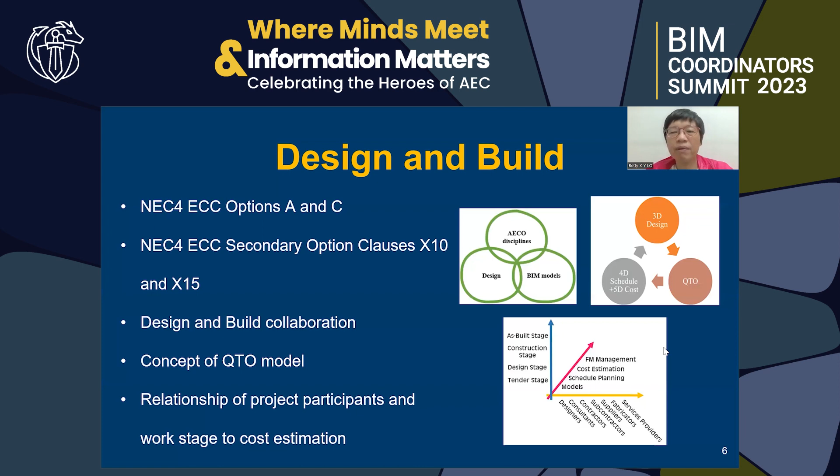Now, the workflow of automatic QTO and cost estimation. Data collection: preparation of pricing documents, project manager instructions, and design drawings; establish QTO modeling and measurement rules. The reference setup: project parameters for QTO, work sets for bill numbers, basis for compensation events, CE items; then modeling the 3D objects and data input, and information output: schedules of QTO, cost estimation, and analysis.

And the workflow of the QTO model. Establishing the QTO concept is the most critical step, to create a guideline for the QTO BIM model. It determines the rules, method of modeling, and outputs, whether the data can be sufficiently obtained, extracted, and calculated. Set up QTO parameters in projects. Apart from the BIM software-based functions gaining the values, the shared parameters listing the QTO main parameters and the units format have to be set precisely.

And then modeling. The modeling methods can be various. Familiarizing with the concept of QTO is crucial to create different elements. It affects whether the units are shown or not from the elements, which can be read and extracted. The output best fits to process further steps, and then results and information. Use schedules and add-in programs or software to filter, extract, and record the information from the model elements.

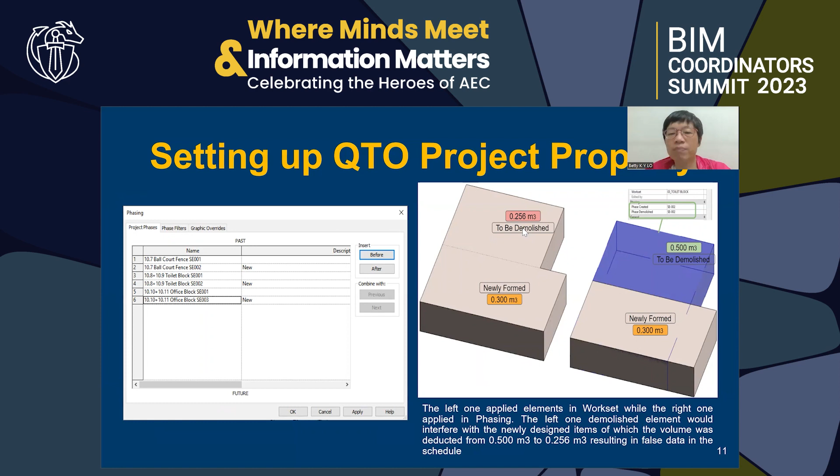And also, we can use phasing, because you enhance the data more correctly. If using the traditional applied elements in work sets, the demolished element will interfere with the newly designed items, of which the volume was deducted from 0.5 to 0.256 cubic meters, resulting in false data in the schedule.

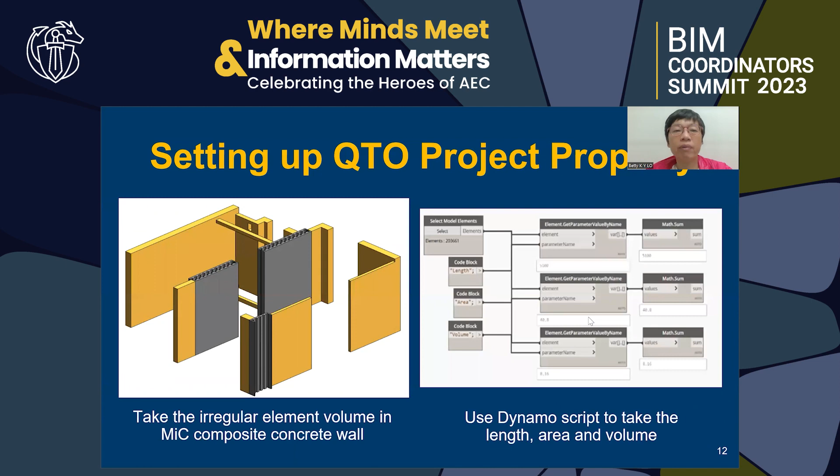Check the irregular elements volume in MIC, that is the Modular Integrated Construction composite concrete wall, by using a Dynamo script to check the length, the area, and the volume. For the BIM approach to QTO, we can paint the formwork, the side area, and soffit area in the Revit family. The formwork modeling for calculation splits the face to avoid calculating the interface area between the walls, beams, and slab.

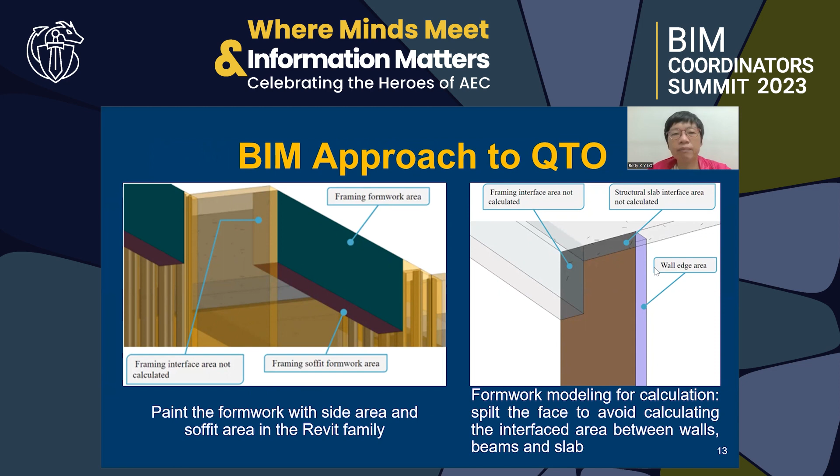Here is another diagrammatic illustration of a column. You can see that from drawings of different elements as the column. Here, we can set out different parameters to calculate concrete volume and its formula. And also by means of software, we can do it clearly.

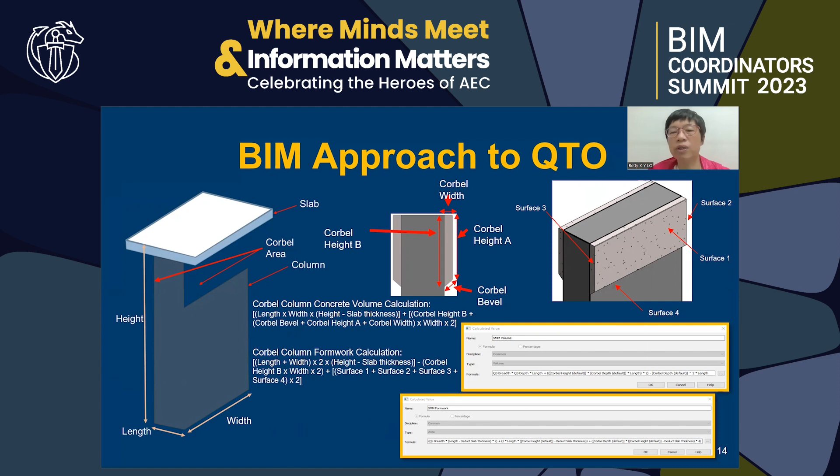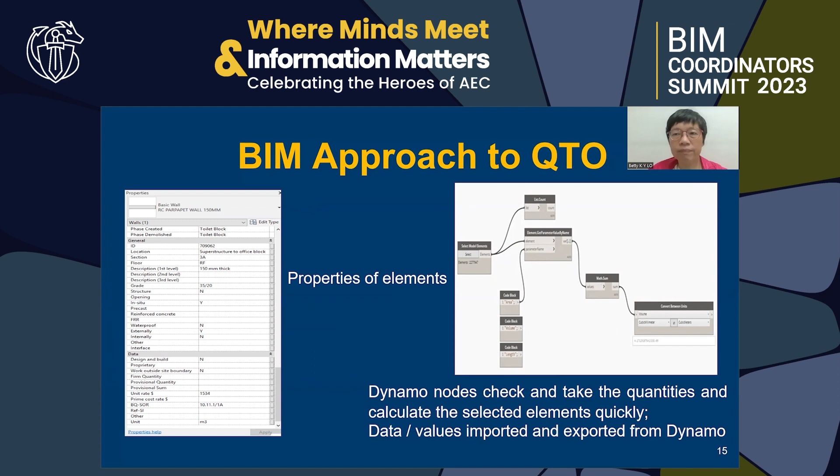And for the properties of elements here, the Dynamo nodes check the quantities and calculate the selected elements quickly. Data values import and export from Dynamo. And then from the general schedule, the volume formula can be calculated from the data, information input, and the setting in accordance with the standard method of measurement, and also the progress, start and end date, the type of zone, and also the payment information.

Here come the results, for example, in the excavation items: the QTO quantity found between model quantity and BQ, from the calculation of different elements, also different descriptions of specific parts of the different location and depth. These quantities are found very close to the designed drawings.

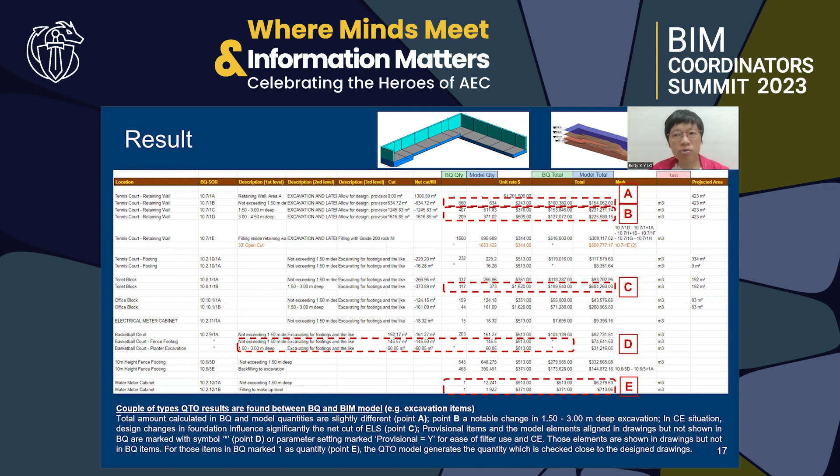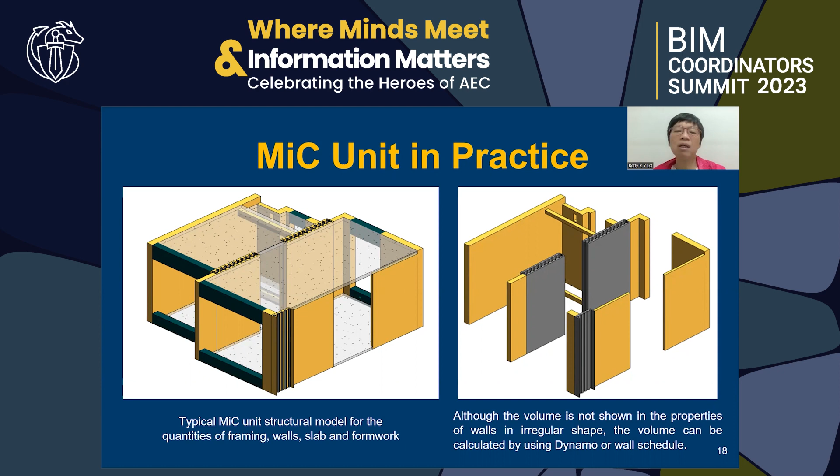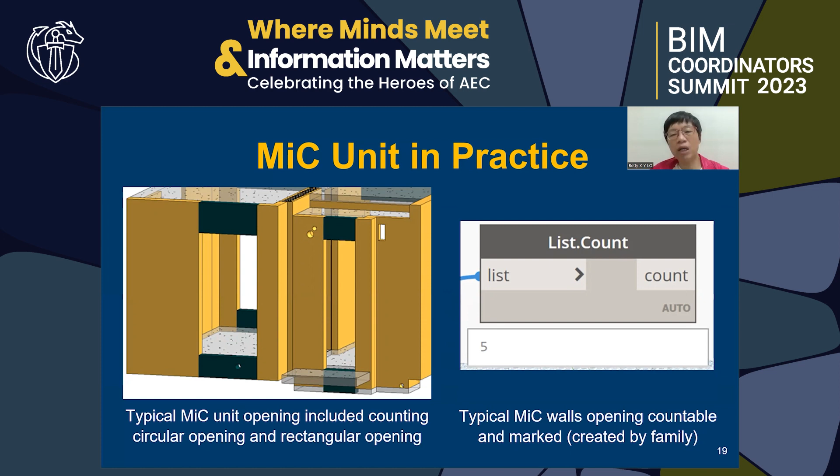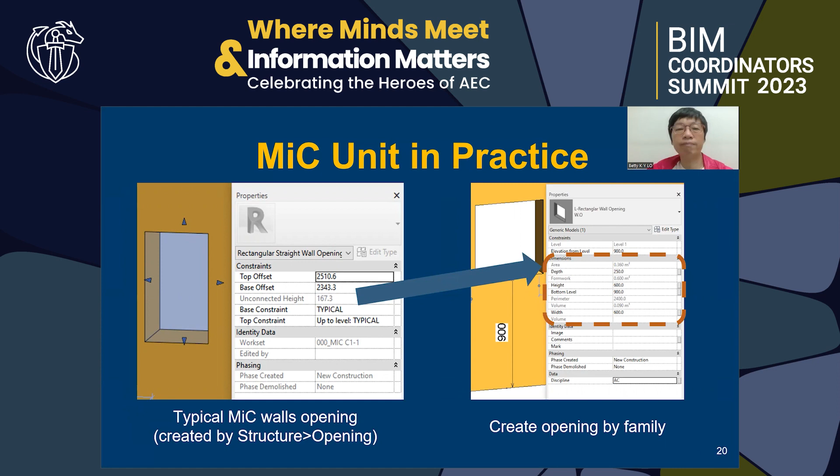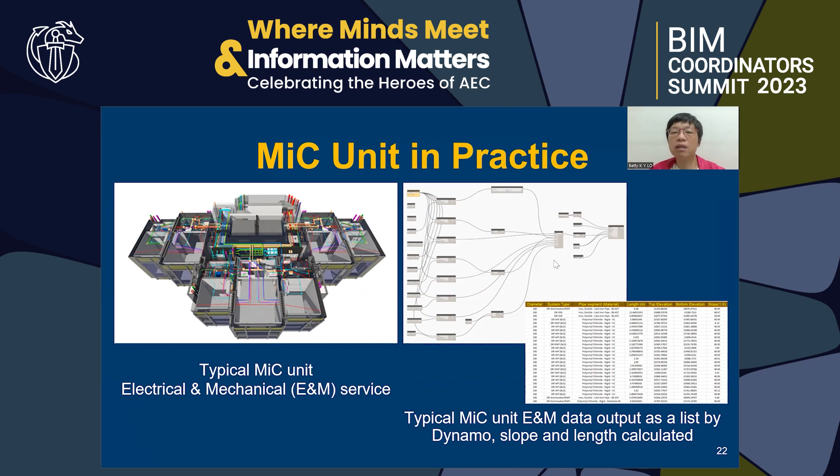Here it shows how to do it. You can see the setting, the properties are created by structure, and then the opening is created by family here with the area, depth, height, bottom level, width, all kinds of crucial, useful information. Here, you can see the schedule level, the setting of the constraints in the family creation. For the E&M services, the E&M data output as a list here, a table in Dynamo, with the slope and length calculated.